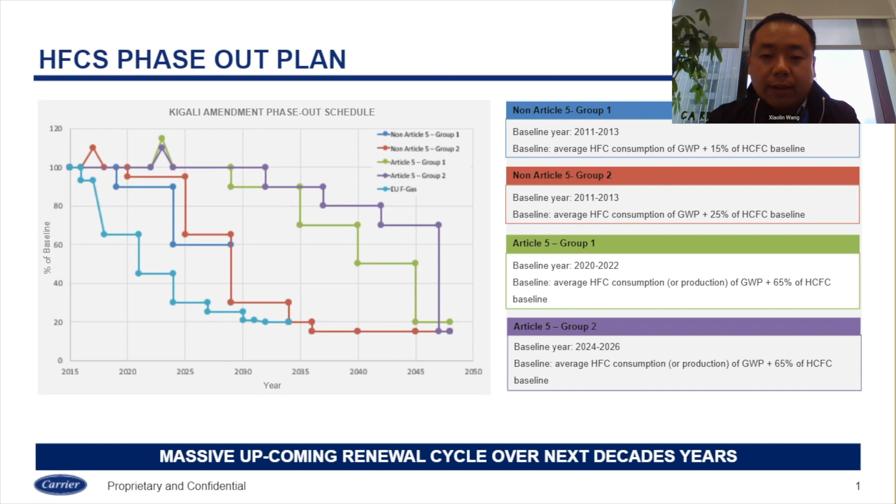Okay, we come to the second page, which is the HFC phase-out plan. So here, I would like to echo the importance of environment-friendly refrigerant application or refrigerant business. Since we have been seeing the massive upcoming renewal of refrigerants in our business, this is very important for our application in this area. So next page, please.

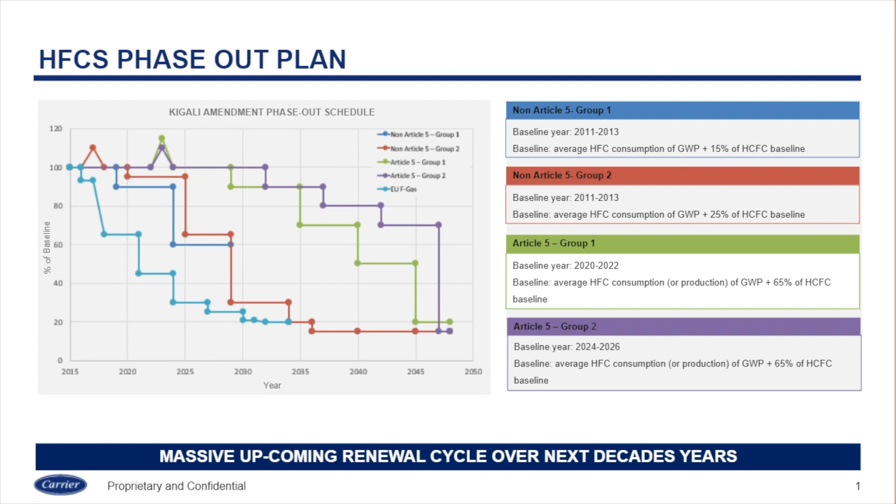So this one shows why CO2 is being selected as a refrigerant. Basically, we have four reasons CO2 is a good candidate as a refrigerant. The first one is it's an environment-friendly refrigerant. The GWP equals 1 and the ODP equals 0, so it has no impact on your environment.

And the second one, most important, is safety of the refrigerant. CO2 is classified as A1, which is a non-toxic and non-flammable refrigerant. So it's pretty safe for residential and commercial application, okay?

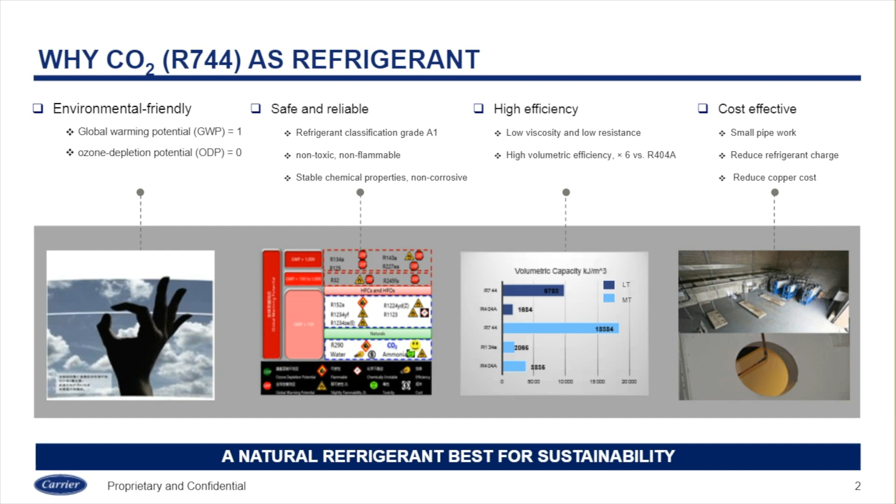So coming to the third and the fourth one, CO2 is very highly efficient and cost-effective compared to other refrigerants like ammonia or HFCs such as R404A or R410A, and it has good heat transfer performance, especially at low ambient temperature and in low temperature applications. So that is the most effective use for CO2 as a natural refrigerant. Okay, next page, please.

Carrier has been a global HVAC and R player in the market for CO2 tech. Actually, we have about four technologies. We introduced the CO2 cascade system to the market. This is the most common technology we are using so far. We are using CO2 as the low side refrigerant, and on the high side, we are using ammonia or HFC. This is targeted to the all climate application for the system.

Coming to the next, 2004, we introduced the pure CO2 transcritical system into the market. And we have different iterations of the CO2 transcritical booster system, which has a limited application range. It's only focused on the mild and the cold climate, which has a lower ambient temperature range.

But coming to 2014 and 2016, we introduced two very big all-climate products into the market, which is the CO2 transcritical with ejectors. This can be applied to all domains: the warm climate, the mild climate, and the cold climate. So this is our technology journey with the CO2 system. Okay. So next page, please.

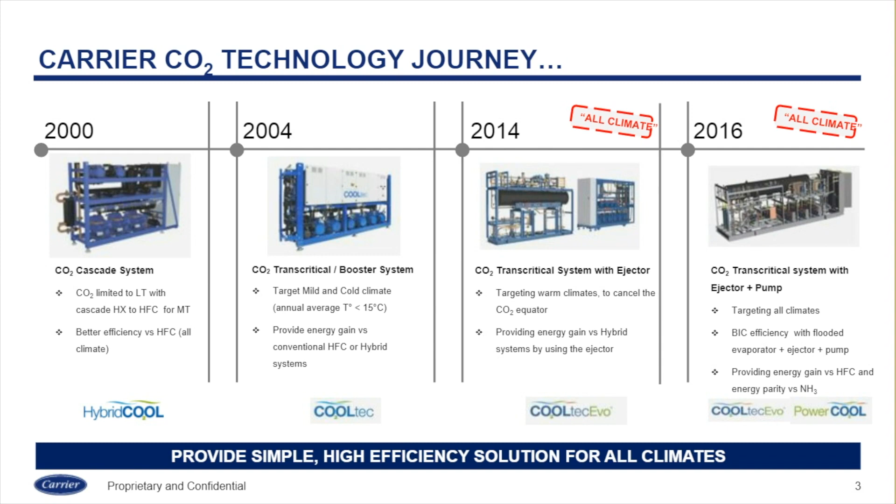This one shows the CO2 solutions for the warm climate. Actually, we aim to introduce CO2 for all climates, and the warm climate has always been the barrier to the technology because of the high pressure of CO2 at high ambient temperature.

Okay, so we have different technologies to address the high ambient temperature leading to high pressure of the system, including mechanical subcooling, parallel compression, or the modulating vapor ejector, which is patented by Carrier, to leverage and improve the system performance. This is the CO2 solution for warm climate.

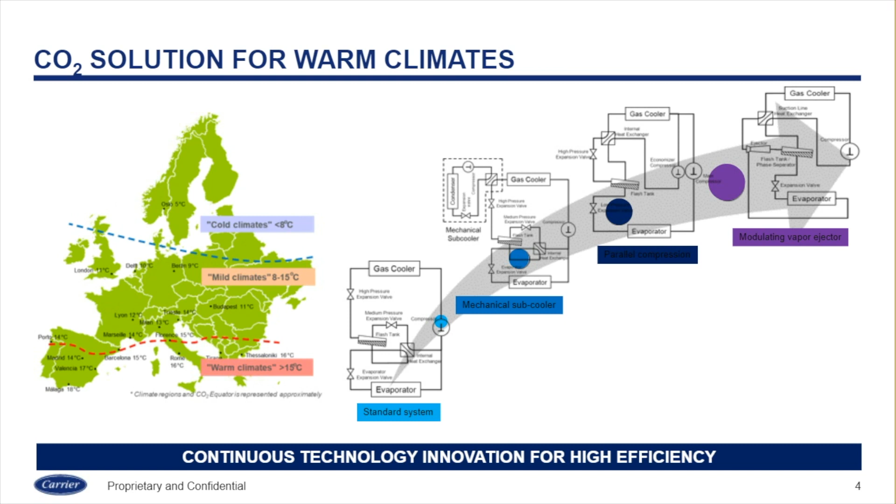Okay, next page, please. This one is the CO2 product marketing segment for Carrier. So far, till now, we have about 18,000 products sold globally, and by the data we have, we have over 50% of the market share, and within the data we collect, 75% are transcritical CO2 system requirements from the market. So this is a very significant trend of CO2 technology applied in the market. So transcritical is the next phase. Okay, next page, please.

This one shows Carrier's CO2 product portfolio. We have different products to address different application needs, from store expansion to industry application. We have from a minimum cooling capacity of 3 kilowatts to the biggest one so far, 1,500 kilowatts, for industry application. So this is a complete solution to cover the different customer needs and application requirements. Okay, next page, please.

So come to the biggest one, which is aligned with our topic today: industry application. Our biggest industrial CO2 product is the PowerCool. This is the biggest one we have in the market so far. We introduced the biggest 6-cylinder compressor, which is close to 100 cubic meters per hour of swept volume for each compressor. And all the control logic and all the key component design, like the receiver in the system, is Carrier design based.

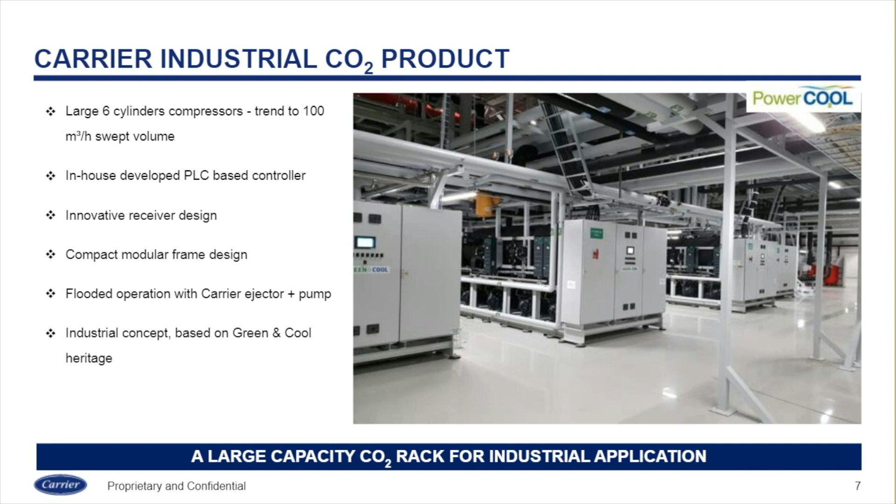This is the product range for the PowerCool. We have 4 versions of the product. A single evaporating temperature for the medium temperature, which is for the cold room. And we have the single evaporator for the low temperature, which is the freezing room. It's close to minus 32; the lowest temperature is minus 40 or 45. And also we have the dual evaporating temperature for the medium temperature and the low temperature.

The fourth version I'm not highlighting here is for secondary cooling. We have the chiller version for air conditioning, which uses a secondary heat exchanger for the air conditioning application. For the application range, we have the heat pump, the logistics center, sport venues, the ice rink, snow arena, food processing, and also supermarkets and hypermarkets. This is the application range for the PowerCool. Next page, please.

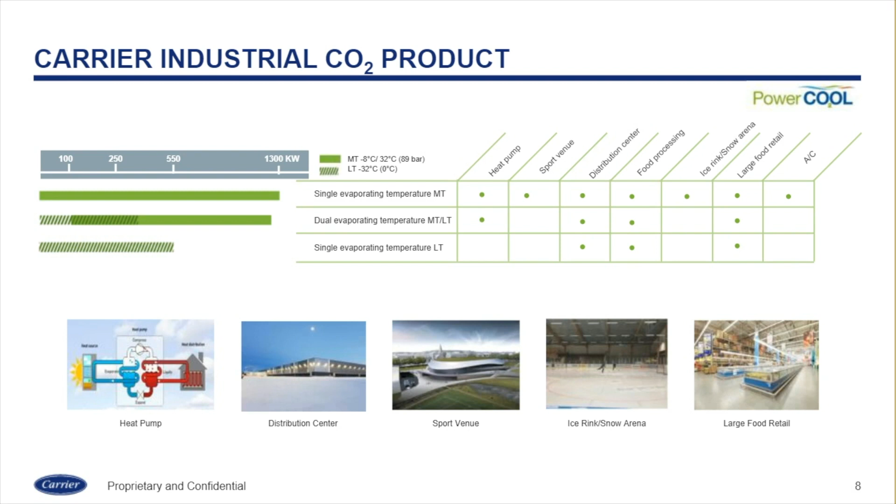Being a high efficient CO2 transcritical product, we have 2 major enablers. The first one is the Carrier patented modulating vapor ejector. This is used to increase the system performance by uplifting the compressor suction pressure. We use the high pressure gas from the gas cooler, in other words the condenser, to uplift the suction gas for the compressor. In that scenario, the inlet suction pressure of the compressor can be uplifted about 3 to 6 bar, which reduces the compressor power input. So this is the very simple logic.

Based on the experiment data we have from the field and the test data, with this modulating ejector combined with the semi-flooded evaporator, the energy efficiency can increase about 17%. Here I take Shanghai, for example, which is in China. But if we consider Southeast Asian countries like the Philippines, Singapore, or Malaysia, the ambient temperature is much higher, so we can gain more efficiency improvement. For example, if the ambient temperature is 30 degrees, the total energy efficiency improvement can be up to 20%. That is a significant energy saving for a big industry application.

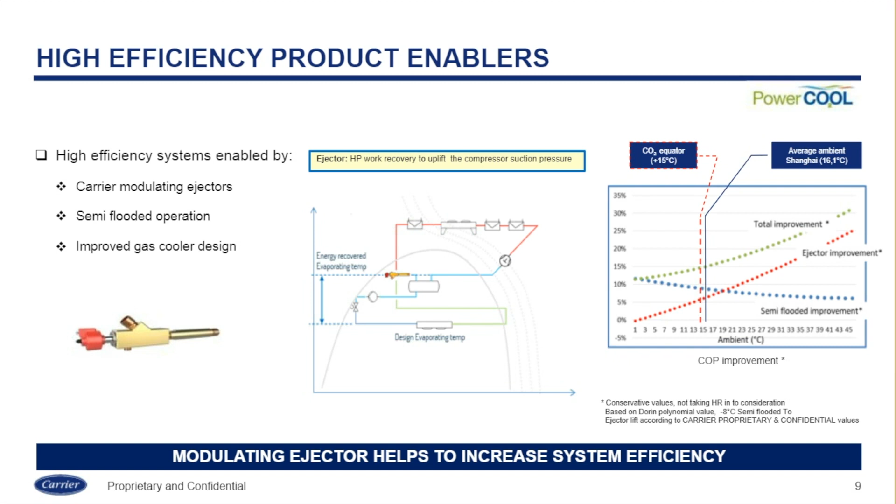The second one is heat recovery. Compared to conventional refrigerants like ammonia or HFC systems, CO2 can provide multiple temperature layers of heat recovery, from low temperature to high temperature. And the heat recovery amount is much more than the ammonia or HFC system. Here we did a very simple calculation. We increased the power input a little bit to uplift the compressor discharge pressure to get more heat recovery from the system. Then the total COP, considering the heat recovery, is up to 5.

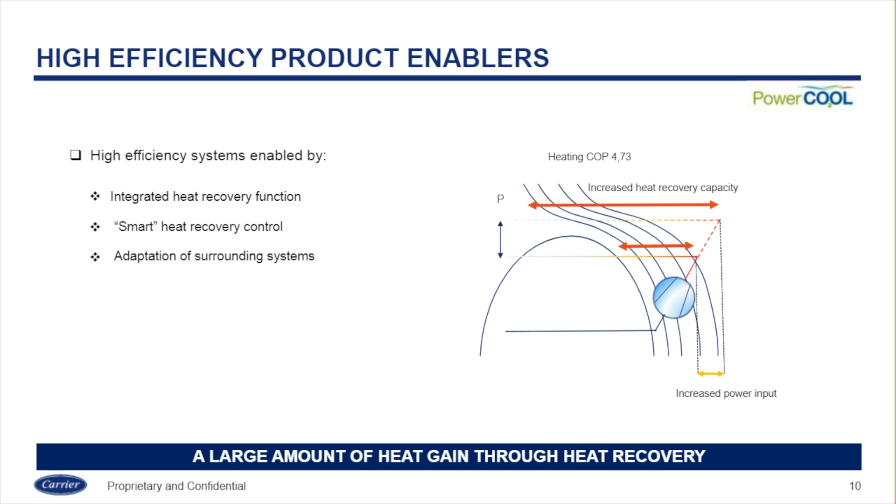If we consider only the cooling, the COP can be 2 or 2.2, 2.3. Now with heat recovery it can be up to 5. This is a very big improvement if we consider a scenario with both heating and cooling requirements simultaneously. So this is the second enabler of the PowerCool product, which is a significant heat recovery provider. Okay, next page, please.

Next, I'm going to go through the case study. We have 4 cases to demonstrate the CO2 transcritical product application. The first one is the large distribution center in Finland. This is a country-sized logistics center. The total refrigerated area is about 30,000 square meters, and the total height is 22.

So this is very big, and it covers the cold area, the frozen area, and the blast freezing area within the 2 racks of around 3,000 kilowatts of cooling capacity. Next page, please.

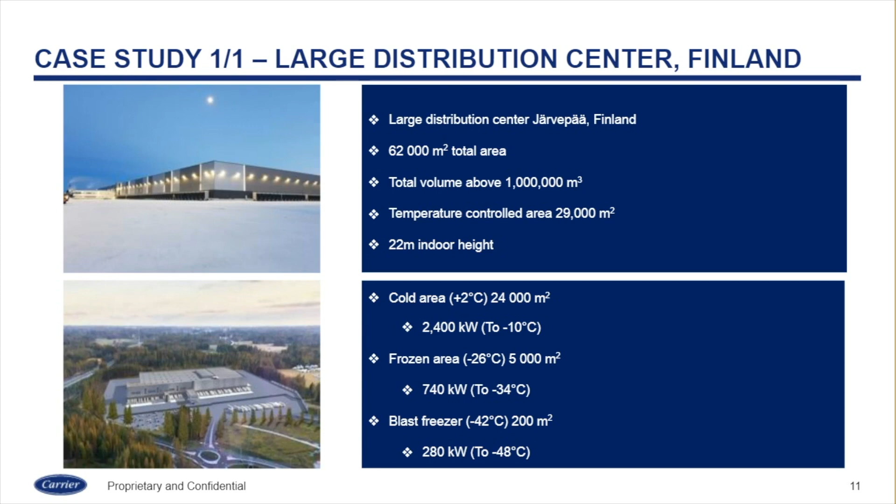This is some of the technology we are using. First, in this area ammonia is constrained to use, and meanwhile we're using a big sprinkler water tank as an energy buffer to store the energy for heating in the winter and also subcooling in the summertime.

Also, considering the heat recovery system, we designed the heat network within the CO2 product heat recovery to gain the biggest benefit from the system. And considering the system EER below 10 degrees, CO2 actually has a much more significant benefit compared to the ammonia system. Okay, next page, please.

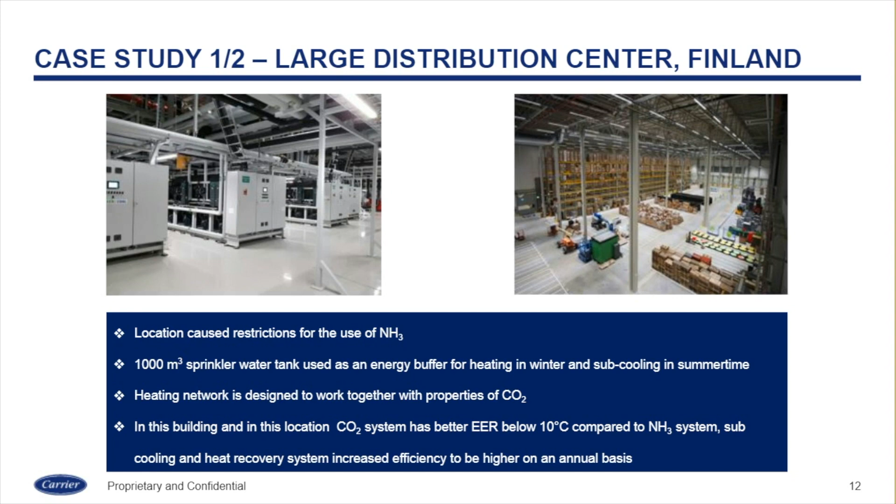This is some of the benefit we gain from the case study of the Finland distribution center. The electricity used by the system here comes from natural resources, wind and water. So the emission of CO2 is negative. Compared to the ammonia or HFC system, the CO2 emission is much less or even negative.

And for energy cost, compared to a conventional refrigerant system, the energy cost saving is about 20% within a similar size of logistics center, and also with the demand of load shaving at peak usage. If we count this side, the total energy cost reduction is nearly 70%. So this is very attractive to the customer.

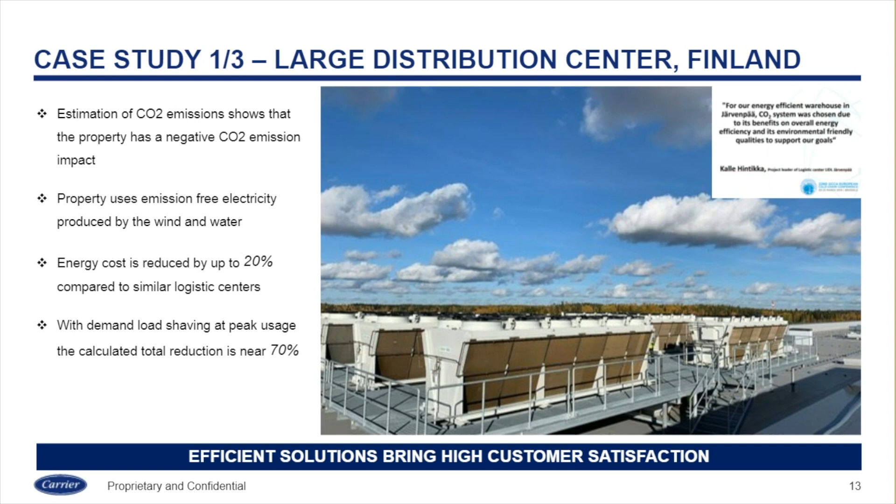As a result, we got very positive feedback from the customer, who highly recognize the system and the solution. Okay. Next page, please. The second case is another logistics center in Spain.

We list it here to demonstrate the warm climate application for CO2 transcritical. This case is in South Europe, Valencia, Spain. The maximum ambient temperature in the summertime is close to 43 degrees. It's pretty hot. And the system is running smoothly, so we can make sure the system runs safely and smoothly. And of course, we gain some benefit from the modulating ejector operation.

Since the temperature is high, we can gain more pressure lift from the modulating vapor ejector. So this is the second case, for Spain. Next page, please.

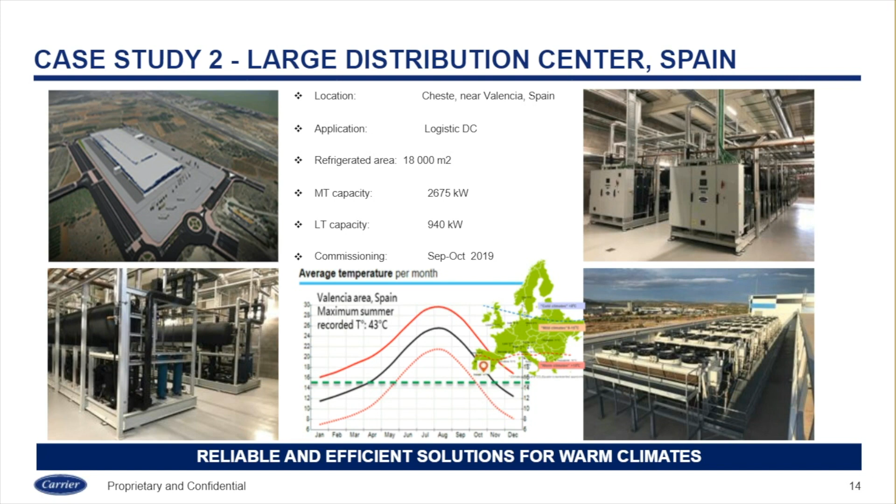The next case is a case study for the food processing industry. This is one facility in China. We compared the ammonia system and the CO2 transcritical. The cooling capacity of the two units is pretty similar. And we counted about 1 month of operation for both systems. You can see the chart here.

August is the hottest season in China. These two facilities run in sequence because they have different duties. We counted the operating hours and the power to account for the total electricity consumption. Based on the data we collected from the field, the total energy saving for the CO2 system is about 8% compared to the ammonia system.

And please bear in mind, this system has no ejector. If we had ejector equipment in the CO2 system, then definitely we could get more energy saving compared to the ammonia system. As I just mentioned, the ejector can uplift energy saving by about 17%.

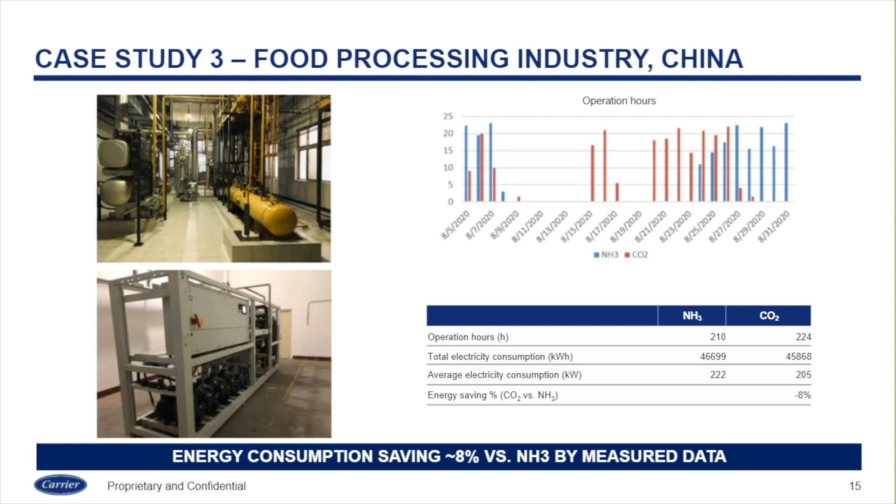So for this case, if we used the ejector, of course the energy saving for this system would be much higher. We would imagine maybe 15% or even 20%. So this is the case study for the food processing industry, the third case. Next page, please. The fourth case is another case study, which is a little bit unrelated to the industrial cold room.

This is also a CO2 transcritical application. This is for the China National Speed Skating Oval. It was built for the Beijing 2022 Winter Olympic Games. So this is the ice rink for the speed oval.

The ice surface is around 12,000 square meters, which is the largest in Asia so far. It has a 400 meter speed skating track, and also two ice rinks, about 1,800 square meters for the two ice rinks.

Also, this is the first CO2 transcritical technology for direct cooling applied in the Olympic Games. We have some CO2 applied in South Korea, PyeongChang, or Sochi in Russia, but this is the first transcritical CO2 technology application for the Olympic Games. The total project size is about 3,600 kilowatt for the cooling capacity, and we are equipping about 6 CO2 racks, 600 each for the cooling capacity, and the CO2 total charge is 43 tonnes for the system. Okay.

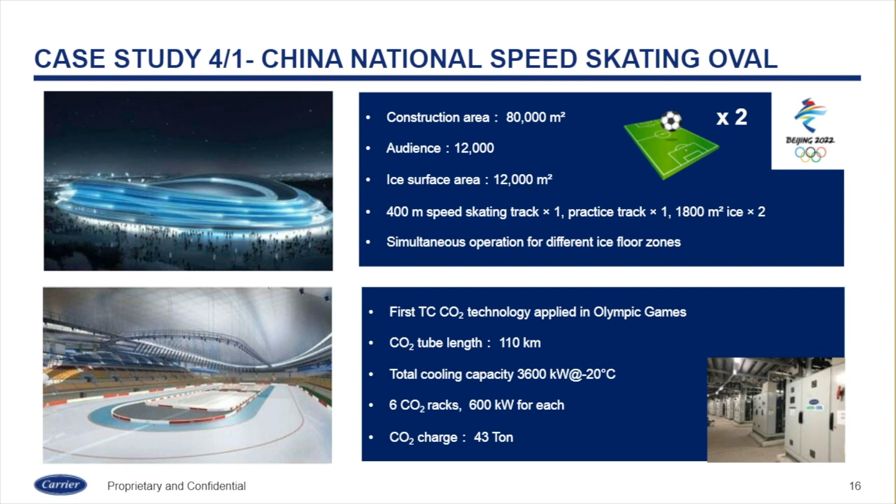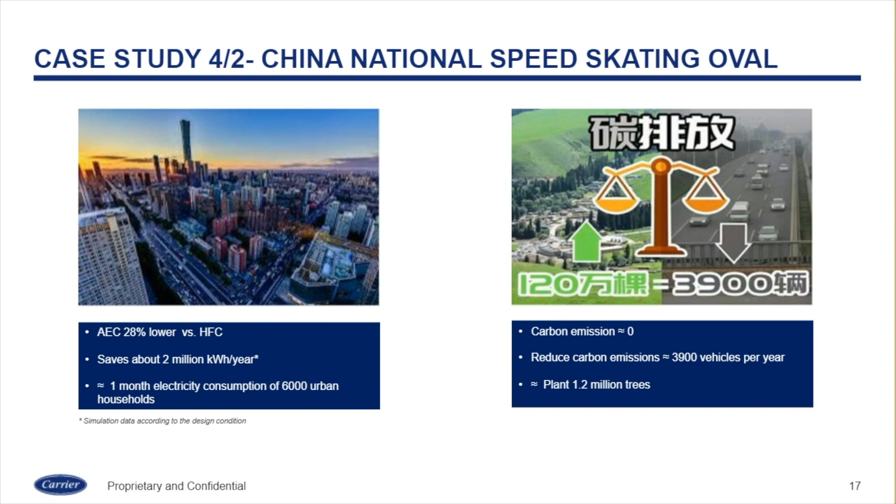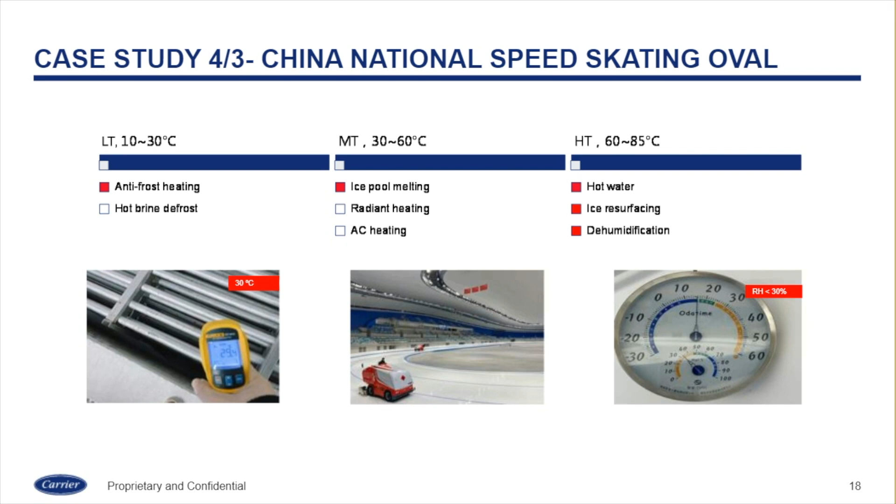Next page, please. This is a quick guide to the heat recovery application for this case. As I just mentioned, the CO2 system has very good heat recovery, covering different temperature ranges and a very big amount of heat capacity. So we have the lower temperature range of anti-frost heating for the ice rink, which is 15 degrees. The middle temperature is about 30 degrees for melting ice. For the high temperature range, 85 degree water is for hot water, ice resurfacing and dehumidification. So this is a very big variety of heat recovery applications for the CO2 system. Okay.